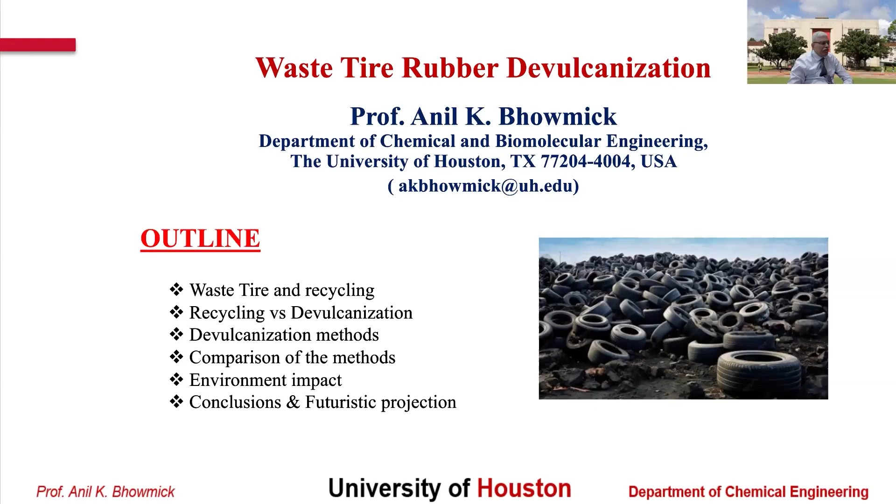All right. This afternoon, I'm going to talk about waste tire recycling versus devulcanization methods, comparison of the methods, environmental impact, conclusions, and futuristic projection. Next slide, please.

The term rubber recycling embraces all types of rubber recycling, which breaks vulcanized rubber into micron-sized powders or soft masses, severing main chains as well as crosslinks. On the other hand, rubber devulcanization specifically deals with crosslink scission without affecting main chains. This is shown in the schematics here, and you can see how the crosslinks are broken down without affecting the main chain. This is called devulcanization, and this is really a challenge.

So devulcanization is a process that involves breaking the sulfur crosslinks in vulcanized rubber to restore its processability and plasticity. The goal is to convert waste rubber into a material that can be reprocessed or blended with the virgin rubber for new applications. Next slide, please.

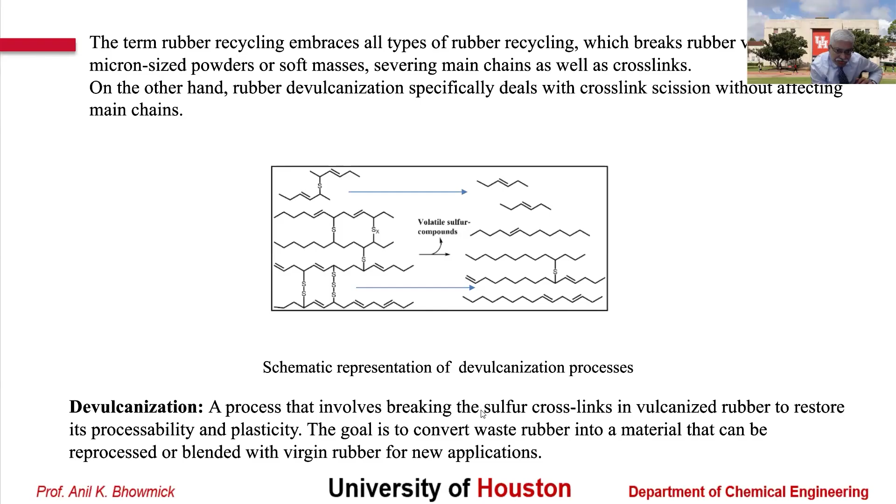How do you know that you have achieved devulcanization? When you do devulcanization, you get lots of polymer back into the rubber compound. So you can measure the sol percentage. That means it goes into the solution. Those particular polymers that are released will go into solution. And you can measure that by ASTM D6814. And then also you can measure the cross-link density, which gives you an idea about the network.

That means before, what was the network or cross-link density? After you devulcanize, what is the network structure? And that gives you an idea. And if you want to specifically know the percentage of sulfur-sulfur bond breakage versus main chain scission, you can do a Horikx method for devulcanization study, which plots sol fraction against the decrease in cross-link density, which is shown on the right-hand side of this slide.

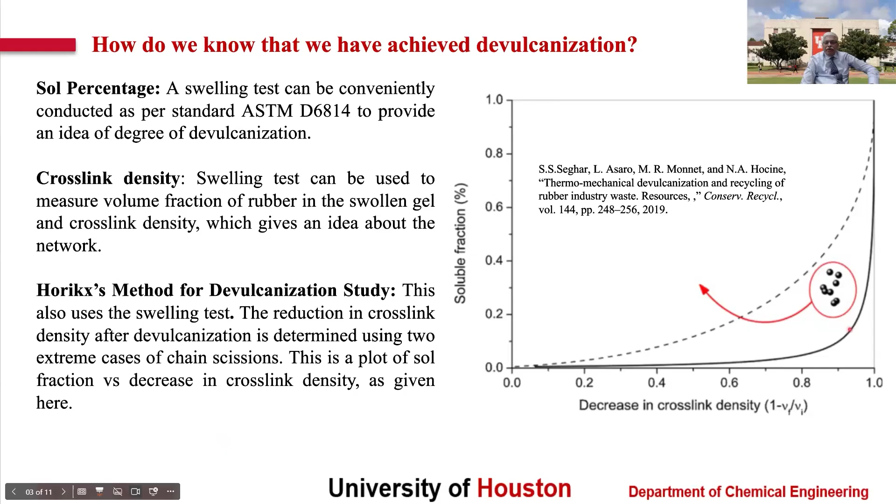And you can see that the points, if they're close to the solid line, that means more sulfur-sulfur cross-link breakage. Next slide, please. Next slide.

But before we do the tire devulcanization, we've got to know what we are devulcanizing. Basically, we are devulcanizing rubber, but different types of rubbers are used. Natural rubber, synthetic rubber. Even in synthetic rubber, you will find different types of synthetic rubbers are used in tires. You have filler, and also you have lots of other ingredients.

Again, in a passenger tire, the amount of rubber is different from the truck tire. For example, in a truck tire, you have more natural rubber than synthetic rubber for lower heat buildup, better crack resistance, and all these properties. Next slide, please.

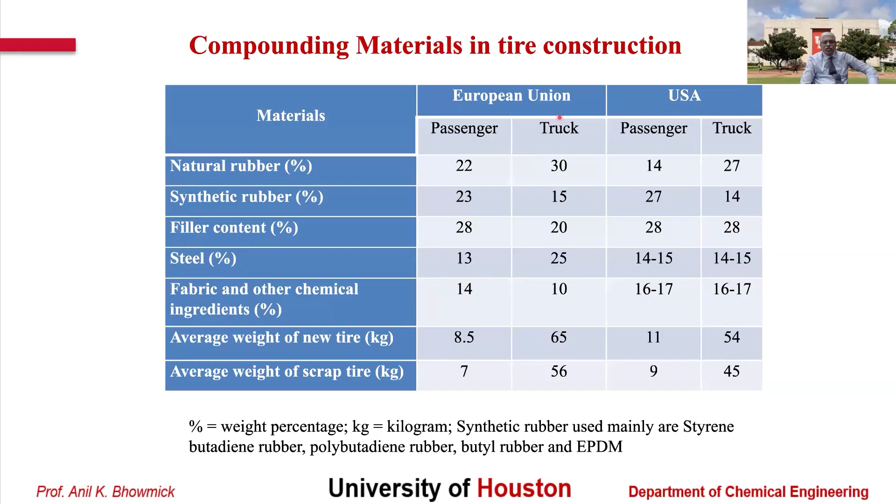There are different types of devulcanization methods. One is thermal. Second is mechanical and thermomechanical. And if you put chemicals into it, then it becomes mechanochemical and thermomechanochemical. Then you have the third category, which is chemical.

You have ultrasonic devulcanization, you have microwave devulcanization, you have supercritical solvent devulcanization, and then you have biological devulcanization. These are all covered in my review to CalRecycle for details. Next slide.

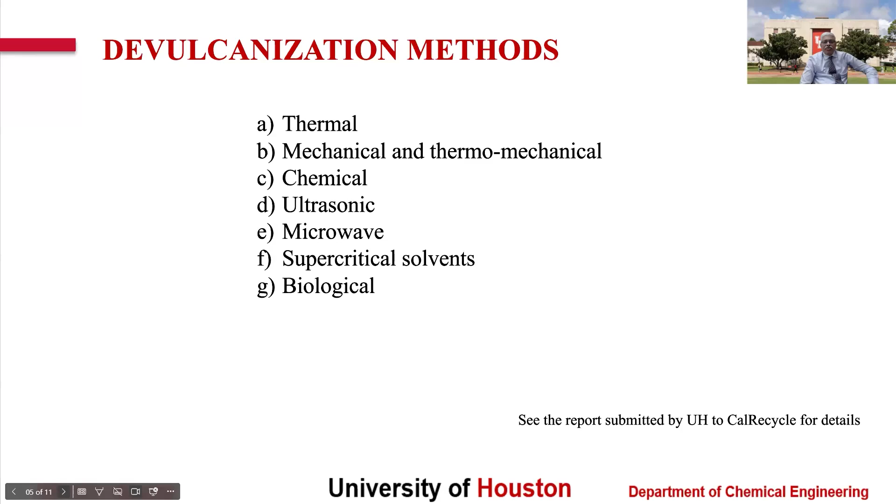Since the time is short, I'm going to tell you only one method, which is the thermomechanical method, which is extensively used in this world, which is the batch mixer or extruder process.

And you can use, for example, a single screw or twin screw extruder, which is shown on the right-hand side here. And the procedure is: first you have the pre-treatment, then feeding into the extruder, heating and shearing, devulcanization, and then you get the product out of it, and then extrusion. The whole process is an extrusion.

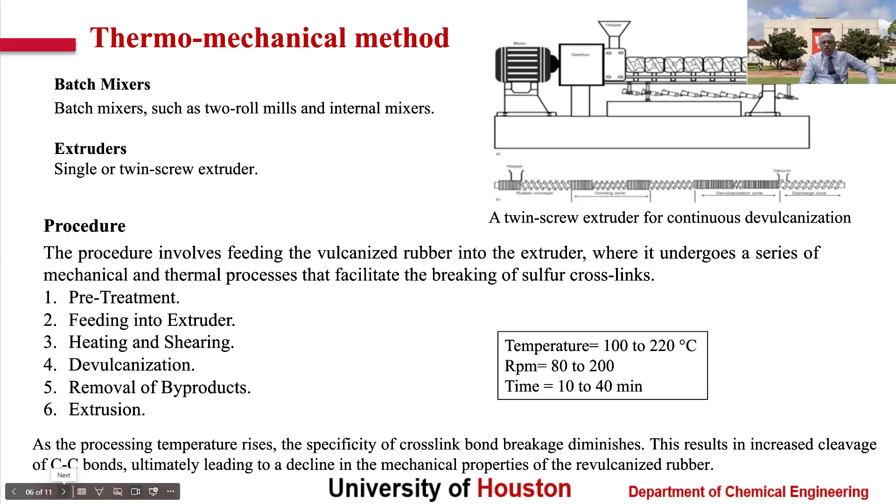The typical temperature is 100 to 220 degrees centigrade, RPM 80 to 200, and time is 10 to 40 minutes. As you know, as the processing temperature rises, the specificity of cross-link bond breakage diminishes. Hence, the temperature limit is 220. Beyond that, there will be a lot of bond breakage, which is not desired in this particular operation. Next slide.

We can compare different methods. For example, in chemical, we use lots of chemical agents, flexible, but you have the limitation of chemical waste or safety concern. Mechanical, thermomechanical, mechanochemical, or thermomechanochemical: you use shear, heat, and then chemical, low cost, easy setup, but your quality is inconsistent. Microwave, ultrasonic: in one you get microwave energy, in another ultrasonic waves. These have high equipment cost, very expensive, and a complex setup in ultrasonic.

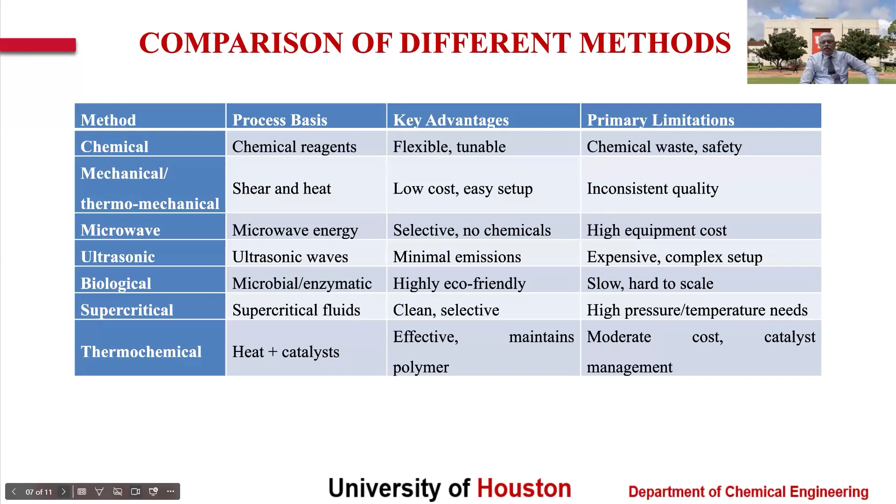Biological is really eco-friendly, but very slow, and you use a microbial or enzymatic process. Supercritical is clean, but you use high pressure and high temperature. That is the limitation. And thermochemical, of course, heat and catalyst, effective, and maintains the polymer, but it's a moderate cost, and catalyst management is a problem. Next slide.

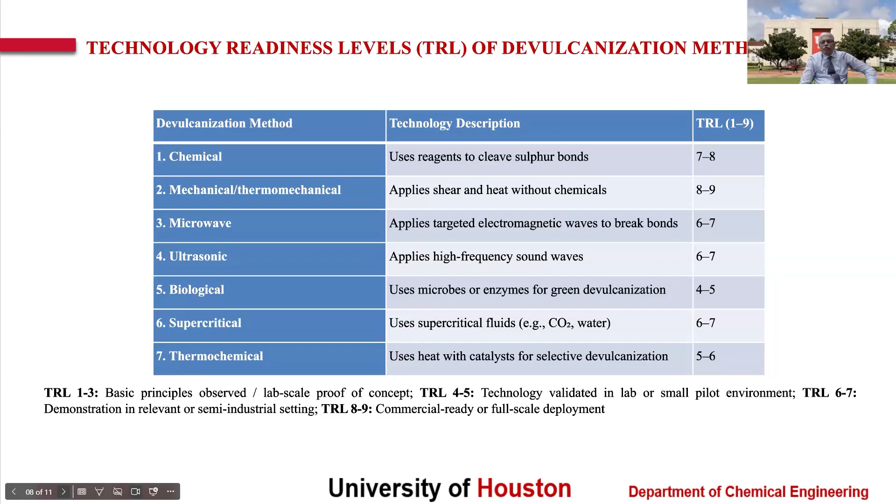Now, there are different technology readiness levels of the devulcanization processes that we just discussed. Chemical is 7 to 8 technology readiness level. The best one is mechanical or mechanochemical, thermomechanical or thermomechanochemical, which applies shear and heat with and without chemicals. Its technology readiness level is 8 to 9, extensively used all over the world, Europe, Japan, China, everywhere. Microwave is 6 to 7, ultrasonic 6 to 7, biological 4 to 5, supercritical 6 to 7, and thermochemical 5 to 6. Next slide.

Now I'm going to tell you about the environmental impact of devulcanization. That is a paper by Costamagna. This study compared the environmental impacts of producing virgin EPDM versus recycled EPDM through devulcanization. Normalized environmental impacts based on 1 kg of virgin EPDM versus recycled EPDM. On the left-hand side, you will see climate change versus resource use. Climate change impact was reduced by 79%, fossil resource use by 91%, and freshwater ecotoxicity by 89% compared to virgin production. Next slide.

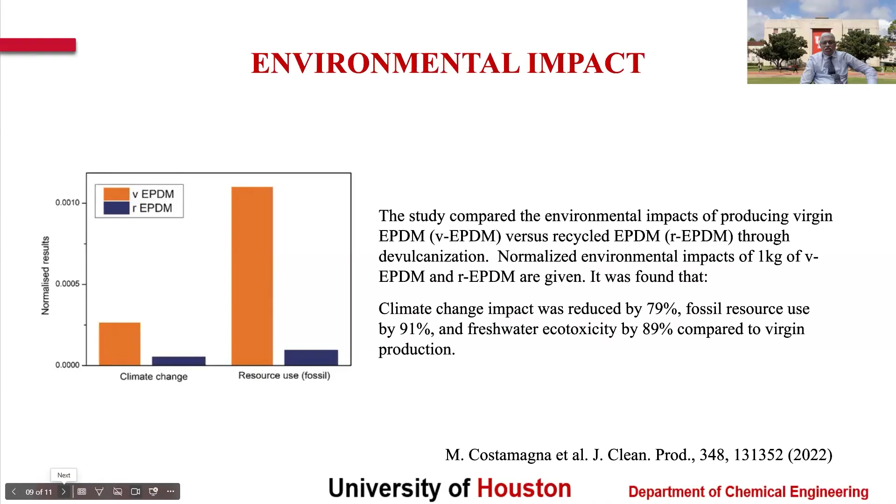This is the last slide. In conclusion, for the future, hybrid techniques will be more and more popular, for example, mechanochemical or biological combined with chemical. This will be more popular in future, and more options will be available to use sustainable approaches, which are currently not there in terms of the chemicals used for devulcanization. So this is a big challenge area, and more work should be done on sustainable approaches. Automation and AI integration are still coming in this industry, and we have to do more work on this.

One of the problems with devulcanized rubber is material property retention. The property is not the same as the original rubber, so more research is needed to improve the properties as close to the virgin material. And also circular economy integration challenges for tire recycling are very important. For example, tire to tire: original tire made from virgin material versus tire made from recycled material. This is a challenge, and if we are successful, then I think devulcanization technology will be very successful.

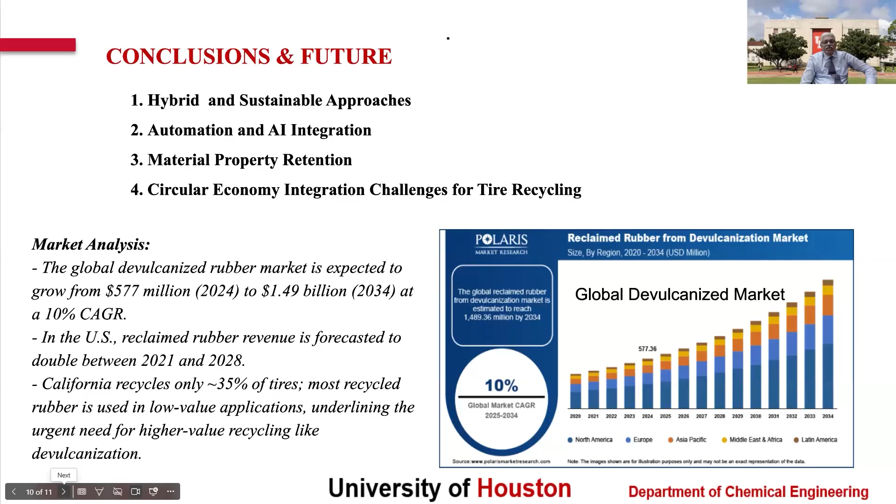Hold on. Thank you very much, Professor. Appreciate that very much for the short, quick overview of all that.

The next thing we're going to do is I'm going to introduce myself a little bit, and then I'll get into the rest of it here. If you know me already, I've been in this industry 38 years. My first 16 years was running plants and transportation in multiple states. And a lot of those facilities were purchased by Liberty many years later.

And then I have worked with CalRecycle as a subcontractor and contractor for 14 different contracts since 2006. I helped with the annual market study every year, helped with product development and worked with about 3,500 labs. A lot of this came as a result of the work with CalRecycle. And I have clients now internationally and nationally.

What's really important has been my involvement with ASTM. I chair rubber recycling. CalRecycle supported that in testing rubber for particle size and using California rubber. I've also worked with David Parker, who is the chair of devulcanization in ASTM, and I am a subcommittee chair for recovered carbon black. So you get to work with the tire manufacturers and the ones that are developing or utilizing different technologies now, which is great.